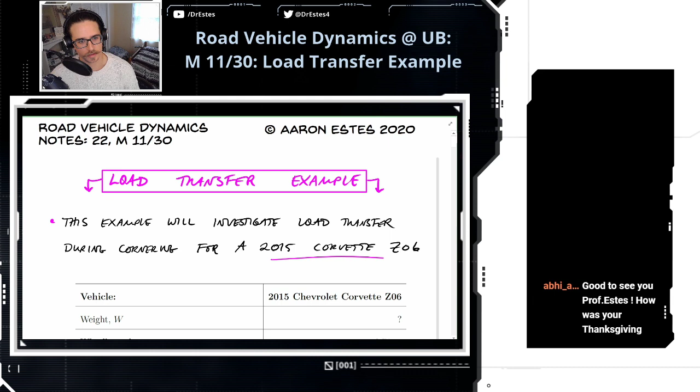So we've been discussing load transfer. When you corner, the weight shifts to the outside. We're going to look at a Corvette Z06, and here I have some vehicle specifications. We'll be coming back to these, we'll need to use these because we're going to have some questions related to cornering with this vehicle. So we'll come back to this.

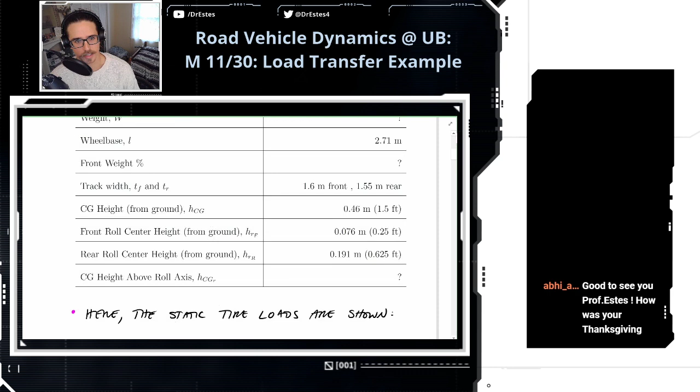But let's look at the static tire loads, and let's just start breaking down some basic characteristics of the vehicle. Because you'll notice up in the table, there's a couple things I left blank, like the weight, the front weight distribution - actually these will be pretty easy to calculate. This one will take a little bit more work - the height of the CG above the roll axis. So first we'll knock out these quantities and fill out these vehicle specifications that we're going to need later on.

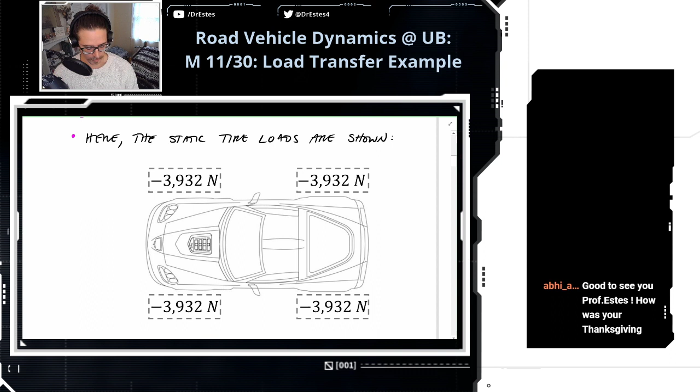Okay, so these are the static tire loads on each tire, so these are the normal loads, the vertical load on the tire. You'll see that the right front, right rear, left rear, they're all the same. So let's first get the mass from here - the vehicle mass, number one, can be determined from the tire loads.

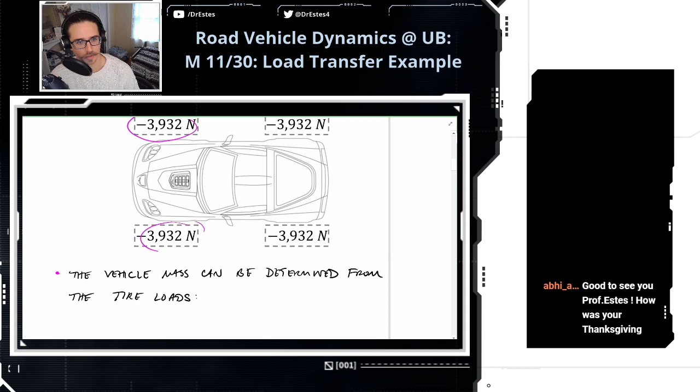So the mass is going to be the weight of the car. Let's get the weight first. That's the load on each tire, and we got to multiply it by 4, so that'll be the total weight of the car. Then we need to divide this by gravitational acceleration to get the mass.

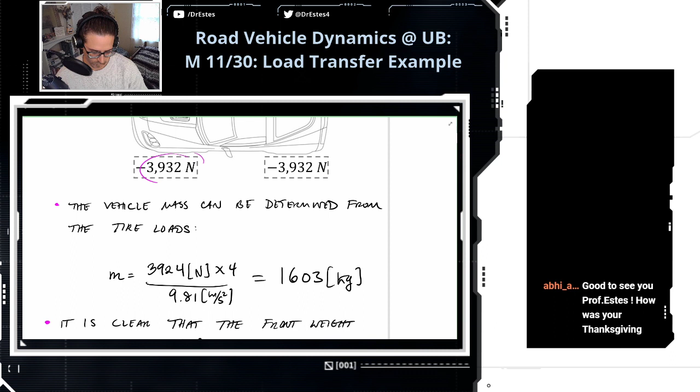If you punch these into your TI-83, or maybe one of those old school solar powered calculators, you're going to get 1,600 kilograms. So that's the mass, determined from the tire loads.

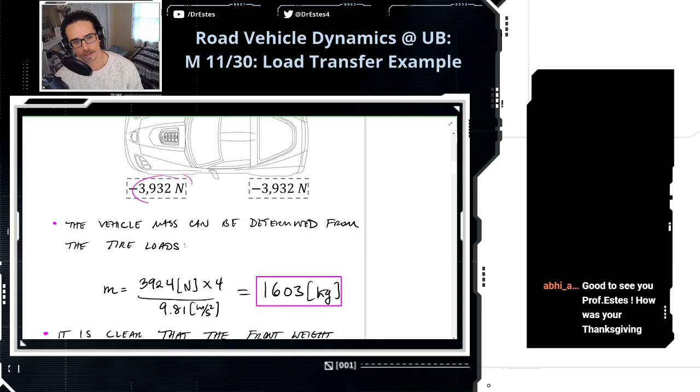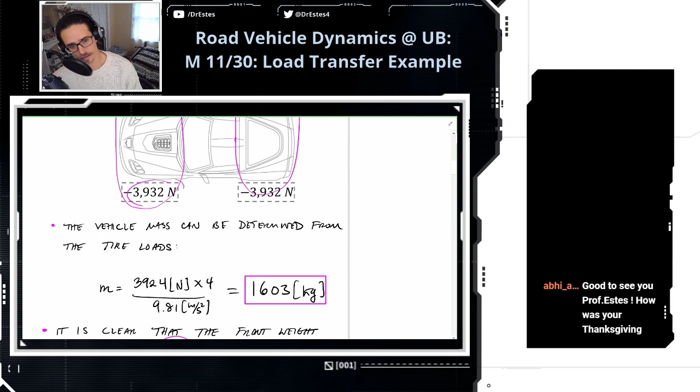What about the front weight distribution? It's clear that every tire is equally loaded, so 50% of the vehicle weight is on the rear and 50% on the front. We call this a 50% front weight car. Sportier cars tend to be close to 50%, sometimes even a little towards the rear, especially if you have a rear engine, which is pretty rare. So the front weight distribution is 50%.

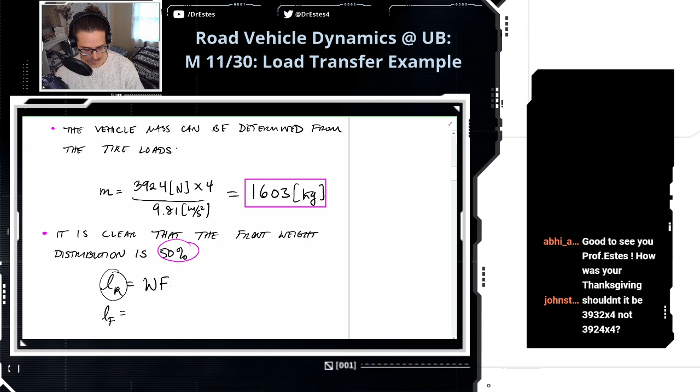So the distance from the rear axle to the CG, that's our front weight ratio, which is just 0.5 times L, the wheelbase.

Shouldn't it be 3932 times 4, not 3924 times 4? Oh, good grief, wait, why did I write 24? Thank you very much, Johnston. Wait, is my number still right? I don't know why I wrote 24.

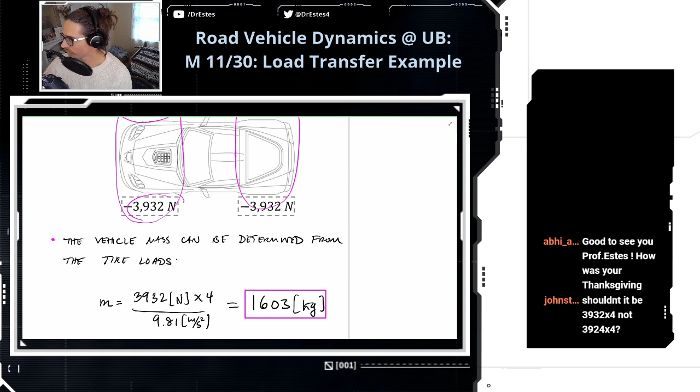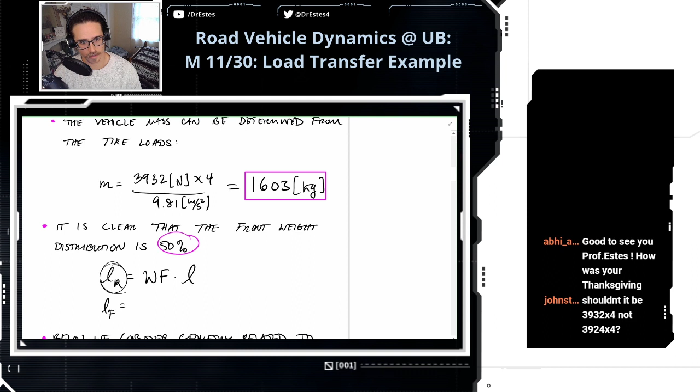So the distance from the rear axle to the CG is the front weight times the length of the wheelbase, which is 2.73 meters. So we got 0.5 times 2.7, or wait, was it 2.71 meters? I got to check the table. 2.71, okay.

So that's 1.355 meters from the rear axle to the CG. If you want the distance from the front axle to the CG, you just take the total wheelbase and subtract that distance above, because these two distances have to add up to the wheelbase, and they're equal. Not unexpected, since it's a 50% weight distribution, so these distances should be the same.

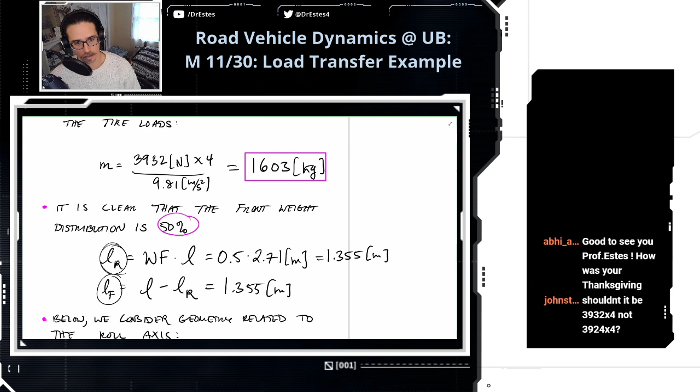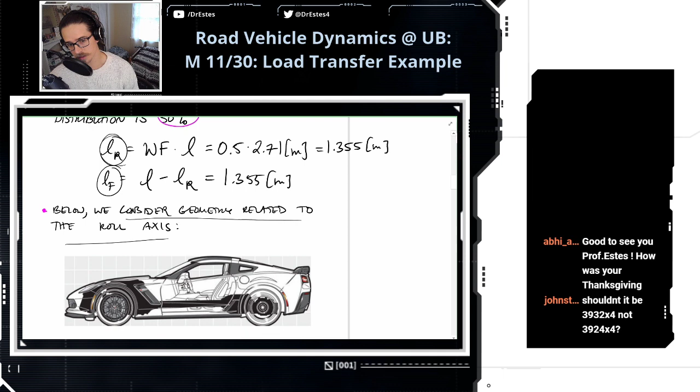So we have the mass, we have the weight distribution, we have LF and LR. Now what I want to do is get some geometry related to the roll axis here, because this is going to be important for load transfer. We're going to draw on this figure in a second, but first we want to get the height of the roll axis.

Let's just start filling in things. We're going to need the height of the CG above the roll axis, but first we need to define the roll axis here. The way to start is first to define the height of the front roll center, the height of the roll center at the front axle above the pavement.

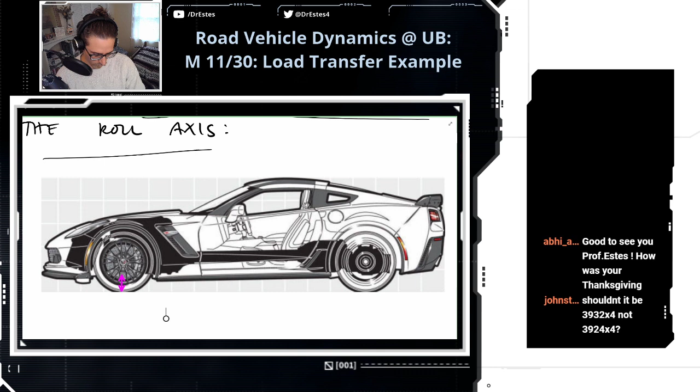You can figure out where this roll center is by looking at the front view of the suspension linkages and determining the instantaneous center, which we did as an example maybe a week or two ago. Maybe we'll do another one of those later. But for a sporty car, the roll center at the front is going to be pretty low to the ground.

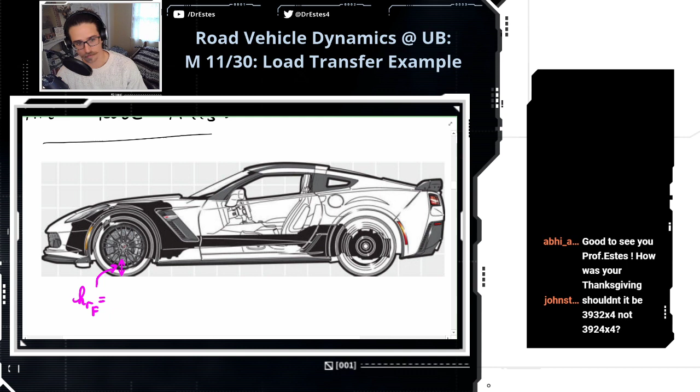From our table, the height of the roll center at the front axle is 0.076 meters, which I think is just like a couple inches. At the rear it's a little bit higher, but still very low to the ground, something like this. So the height of the roll center at the rear is 0.191 meters.

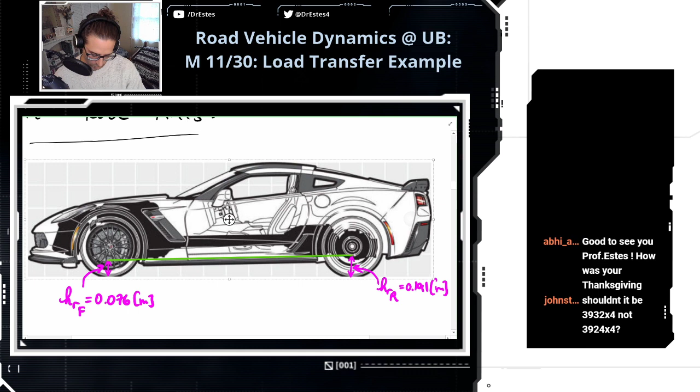Now the roll axis is when you connect these two points from the front to the rear. Let's get a green color here. So I'm going to take the front roll center, extend it back to the rear roll center, and connect them. And here we have the roll axis.

Now this is the axis about which the chassis rolls when you're cornering. This roll axis will actually change a little bit as the body rolls, but we're assuming that it's going to remain constant. A pretty good approximation, but not perfect.

So we're going to locate the CG here, and that depends on the weight distribution. First let's define this dimension, the wheelbase L, 2.71 meters. Now where is the CG within the wheelbase? Well, you can use LR or LF, and since this is a 50% front weight distribution, it's right in the middle of the wheelbase.

Let's try to draw directly in the middle, I'm judging this by eye. Looks perfect, looks fantastic. So this distance that I'm marking out is LR, the distance from the rear axle to the CG.

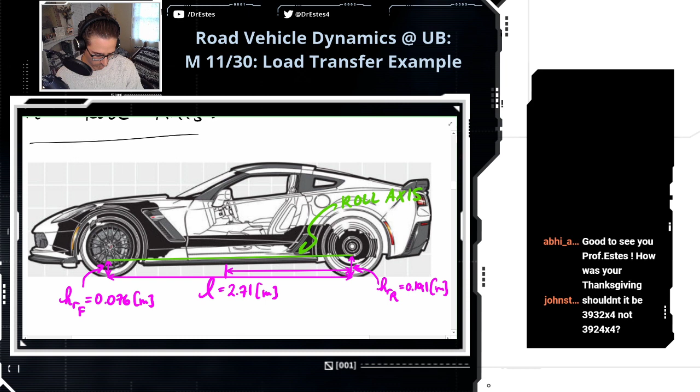And we calculated that to be 1.355 meters, so just half of 2.71. Now the CG, we have the CG height. Let's draw a little line right here, because the CG is going to be located along this line. And it's a height of 0.46 meters. What is that in the table? 1.5 feet.

All right, so we're going to try to draw the CG 1.5 feet above the ground. So I'm going to draw a circle, and I'm going to say this is 1.5 feet. And then we're going to use artistic skills to really dial this in. Come on now. Nice, says CP Alpha, thank you.

I expect all of you to spend as much time and care as I just did when you're drawing your CG. Okay, so we know that this CG is 0.46 meters above the pavement, one and a half feet. All right, now when we're doing load transfer, we're interested in the height of the CG above the roll axis. So I'm talking about this height, the height of the CG above the roll axis, so that's a subscript R on there.

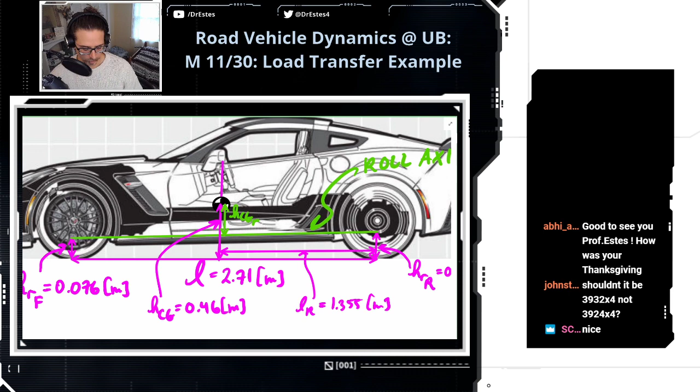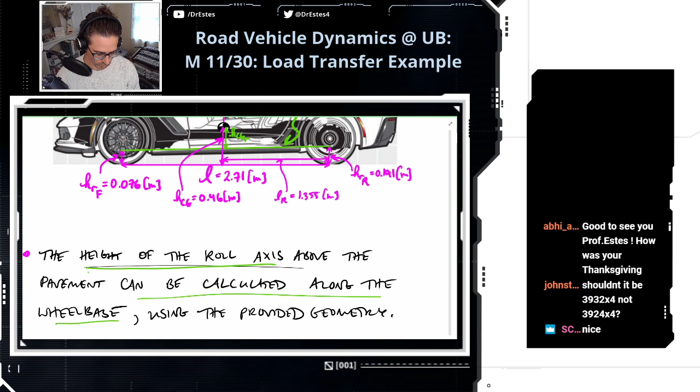So we're going to have to use some trigonometry to figure this out. I have a way that I like to do it, and I'm going to show you below. Okay, so the height of the roll... First, let's just make a function for the roll axis. So the height of the roll axis above the pavement can be calculated along the wheelbase using the geometry that we provided up above. All right, so let's just call the height of the roll axis...

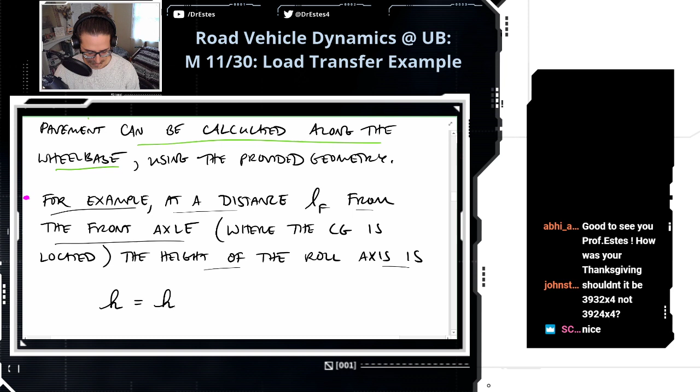So, okay, let's say, for example, at a distance LF from the front axle, which is just where the CG is located, this is going to be the height of the roll axis. So I'm going to think of this just like drawing a line. Like at the front axle, the height of the roll axis is the height of the roll center at the front.

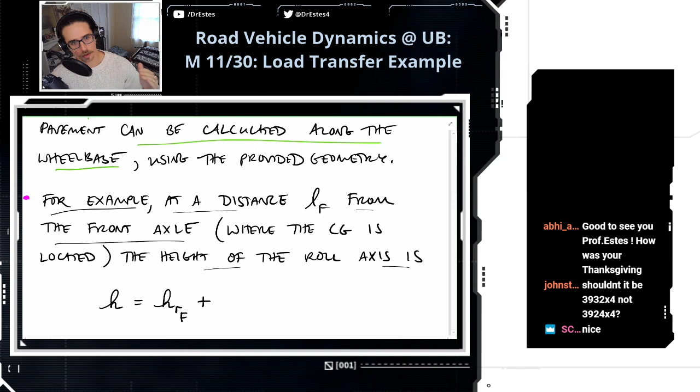And then, how does the roll axis change? Well, it has some slope as it goes towards the rear axle. So you can see that this is slightly inclined upwards because the roll axis or the roll center is higher at the rear. So what is that slope? Well, it's going to be the height of the roll axis at the rear minus the height of the roll axis at the front, divided by the wheelbase, right? That makes sense, that's the slope.

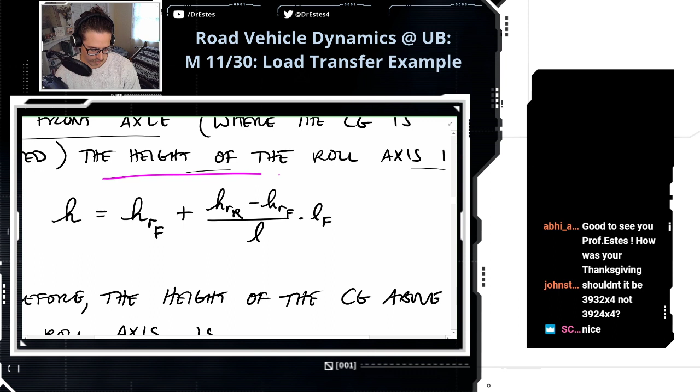And this slope relative to the front axle, it's increasing over a distance LF. So this is going to be the height of the roll axis at the CG. So to get the height of the CG above the roll axis, we just need to take the height of the CG above the pavement, subtract the height of the roll axis at that point. And why don't we just substitute what that is? So it's the height of the roll center at the front plus this slope acting over a distance LF.

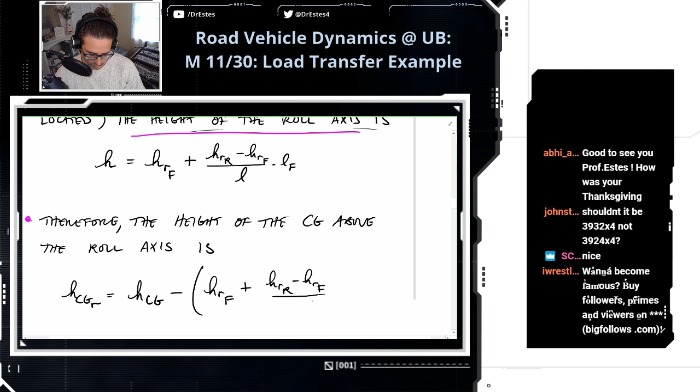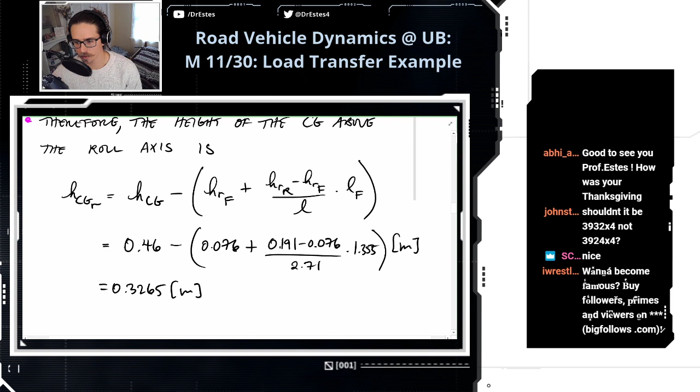So let's plug in some numbers. Let's get the height of the CG above the roll axis. So it's 0.46 meters minus 0.076 meters, plus 0.191 meters minus 0.076 meters over the wheelbase, 2.71 meters, and then LF, what is that, 1.355 meters? Okay, and then we get 0.3265 meters, so like a third of a meter. Let me ban that thing. Okay.

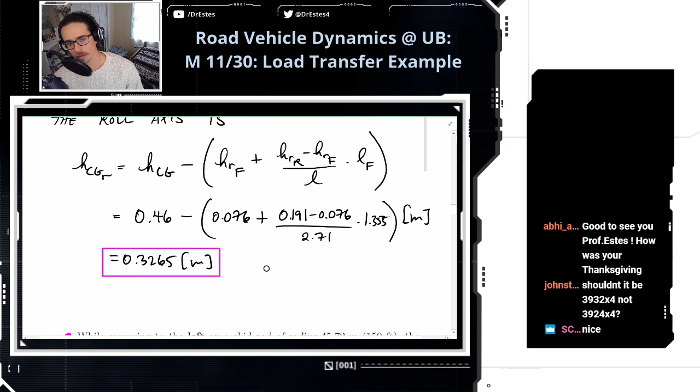Whew, okay, so I think we have everything we need. Now let's introduce the cornering problem. We have all these dimensions and stuff. So here's the story: while cornering to the left on a skid pad of radius 150 feet, the Corvette reaches a maximum speed of 51.9 miles per hour before the tires start to lose traction. So this is just like a standard skid pad test to determine the maximum lateral acceleration capabilities of the Corvette.

Now, sensor data indicates that the roll angle at this maximum acceleration was 3 degrees, positive 3 degrees of rotation about the longitudinal body axis. So based on this information, let's estimate the total roll rate, K phi F plus K phi R, that's like the resistance to rolling, like a torsion spring, for the Corvette. Okay, so let's do it.

The first thing we need to do is we have a formula for what the roll angle of the sprung mass is. The sprung mass is the mass above the suspension. We derived this using Newton's laws. So we have the mass times the lateral acceleration times the height of the CG above the roll center, which we now have, divided by the total roll rate, K phi F plus K phi R.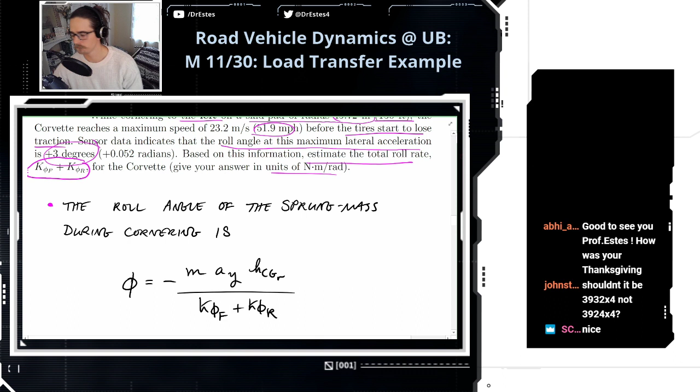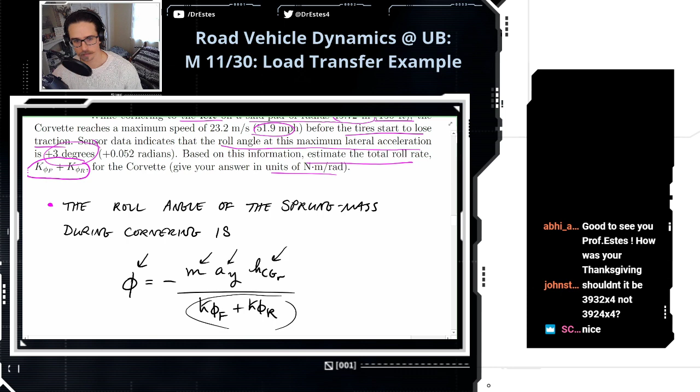Okay, so we have mass, we have the height, the angles given to us. We're solving for this total roll rate. We need the lateral acceleration because we have not calculated that yet.

So the lateral acceleration we can determine from the kinematics of circular motion. The car's moving in a circle on the skid pad, and so the lateral acceleration, at least the magnitude of it,

is the velocity squared divided by the radius of the circle. So we were moving 23.2 meters per second around this 160-foot radius skid pad. So we square that. We divide by 160 feet, but in SI units. And we're going to get 11.8 meters per second squared of lateral acceleration. So what is that, like 1.2 Gs or something?

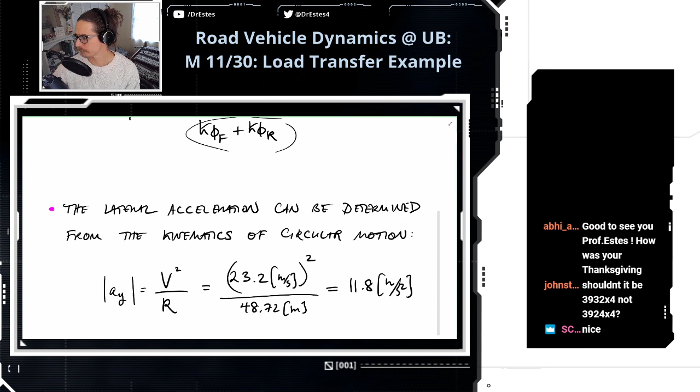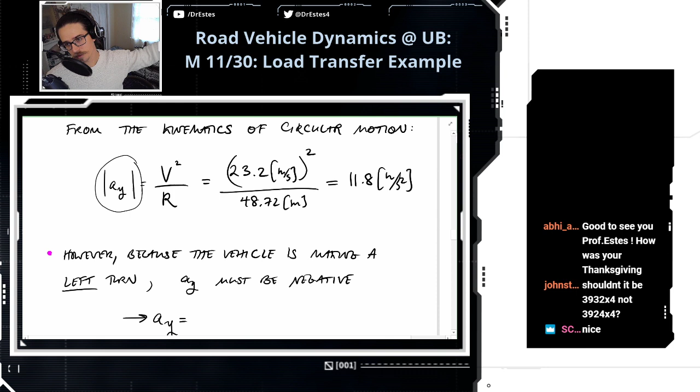Now, this is the magnitude of the lateral acceleration. But let's remember the vehicle's making a left turn. So in SAE coordinates, Society of Automotive Engineers, if you're accelerating to the driver's left, that's a negative sign. So AY must be negative. If we were cornering to the right, it would be positive.

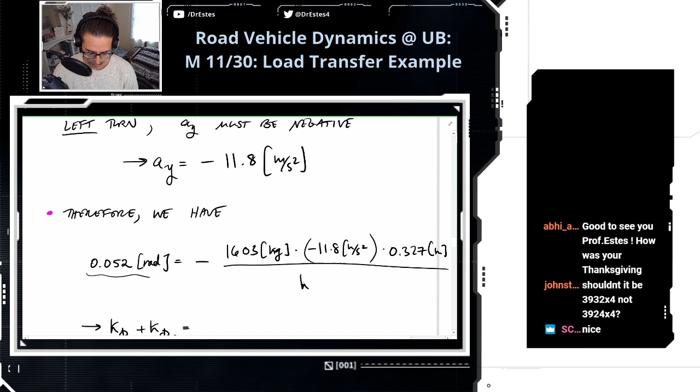Okay, so now we can solve for the total roll rate because we have everything we need to plug into this equation right here. So here we go. This is 3 degrees. So we're just using the formula up above. So we have the negative of the mass, which we got from the static wheel loads. We have minus 11.8 meters per second squared, which we got from circular motion kinematics. We have the height of the CG above the roll center, which we got using trigonometry. And so this is divided by K phi F plus K phi R.

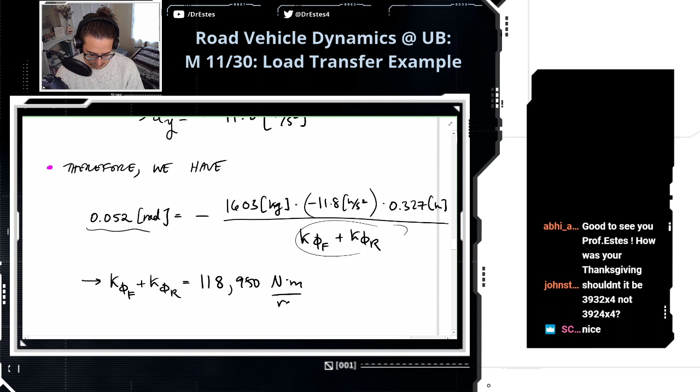All right. So then if you just move this over, solve for it, you're going to get 118,950 Newton meters per radian. That's the total roll rate of the vehicle. So a pretty stiff suspension overall, which results in only 3 degrees of body roll at over 1 G of lateral acceleration.

So if you did this in a minivan or something, you would expect 6 or 7 degrees, 8 degrees of body roll. If you could even get up to a G of lateral acceleration, I don't think you could in a minivan.

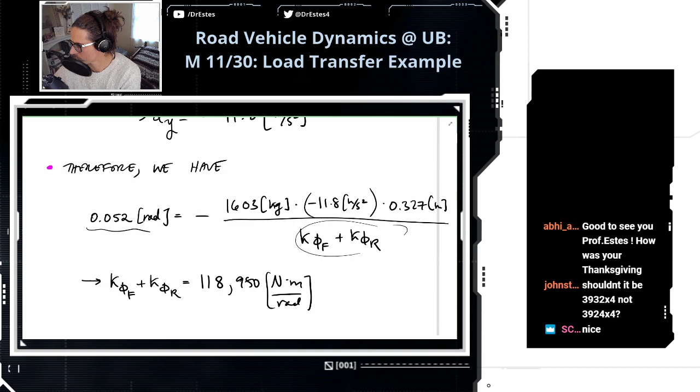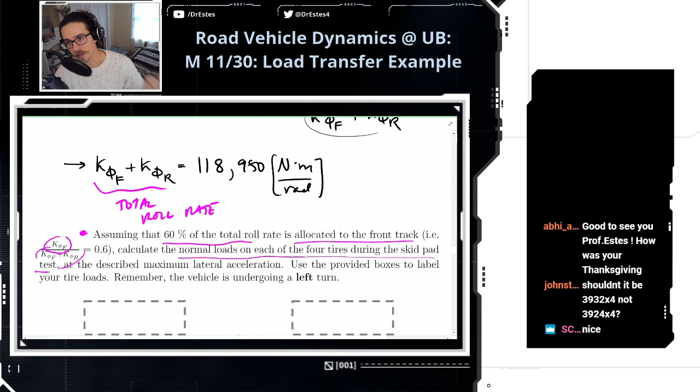Now, here we go. Let's make this a little more realistic. So this is our total roll rate here. But let's assume that 60% of that roll stiffness is allocated to the front track, so your front suspension. So that means that K phi F over the total roll rate is 0.6. So what we're going to do, assuming that 60% of the roll rate is at the front, we're going to get the normal loads on each of the 4 tires during that skid pad test. We're going to predict them. And we'll come back here and fill in these boxes with those loads.

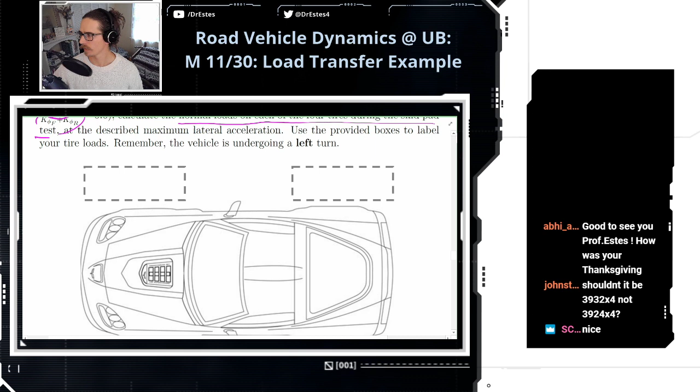All right. So let's first write an expression for all of the tire loads. So left front, left rear, right rear. So these are the formulas we've been using.

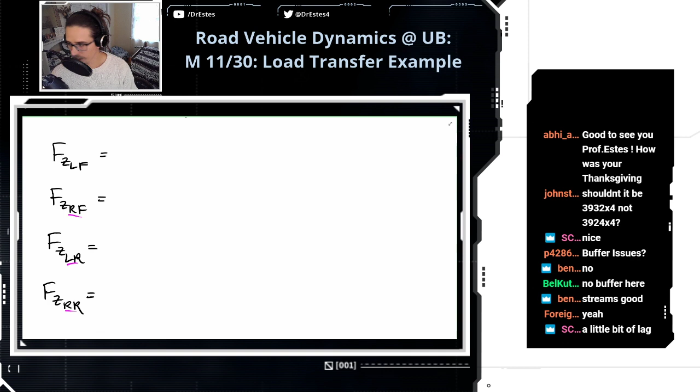So I'm just going to put the static loads here. These are the loads on the tires when it's just sitting still on the pavement, not cornering or anything. FZ at the rear. So this O that I'm putting down there, that just indicates the static load. And because this was 50% front weight, the static loads are the same for every tire.

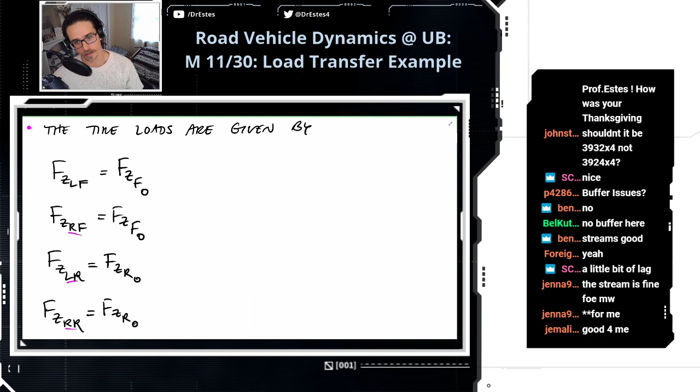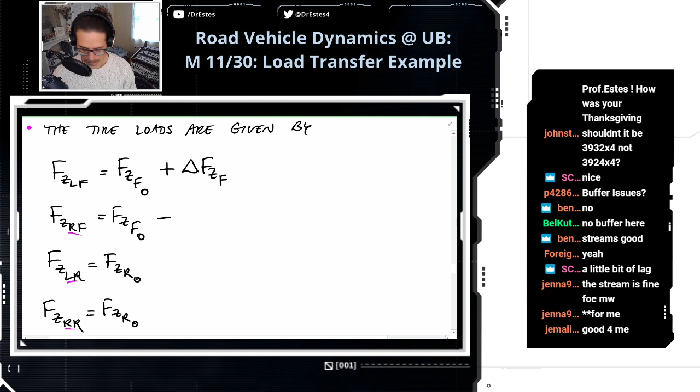Okay, but when we corner, we're going to have load transfer. So we're going to have this delta in the normal load minus. And so we're going to use a formula for this delta. The sign of this term can change depending on the direction of cornering, which is perfect.

Okay. So let's fill in what we know so far. We have the static loads. And then we'll just have to add in the load transfer. We'll put that in.

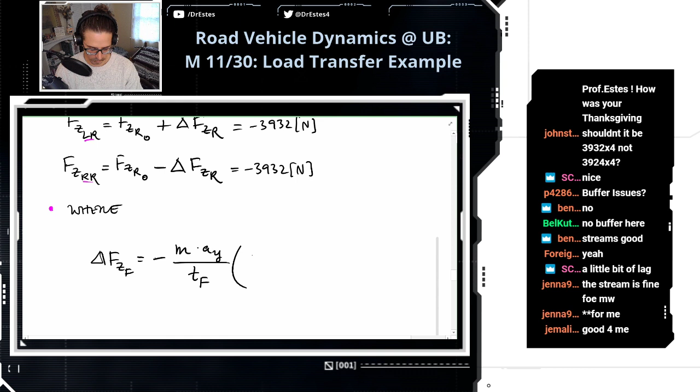All right. So what is the load transfer at the front? We have this expression. The mass times the lateral acceleration divided by the front track width times LR over L, which is the front weight distribution, times the height of the roll center at the front, plus the front roll stiffness distribution, so that's K phi F over K phi F plus K phi R. So this will be 60% right here, times the height of the CG above the roll center.

All right, let's crunch the numbers. We have the mass, 1,603 kilograms. The lateral acceleration, the sign is important here. Minus 11.8 meters per second squared. We're cornering to the left. We have the front track width, 1.6 meters. This is going to be a little different than the rear track width. I think the rear track is a little bit wider.

Okay, the front weight distribution, 50%, 0.5. The height of the roll center at the front, 0.076 meters. And then we have 60% front roll stiffness, so I put a 0.6 there. And then we multiply by the height of the CG above the roll center, close to 1/3 of a meter.

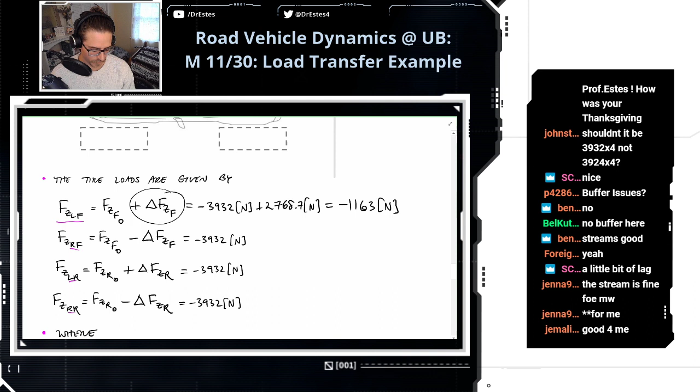Well, it's actually losing normal load. The front left tire is lifting off a little bit, and now there's less weight on it. Does that make sense in a left-hand turn?

Okay, and then this right one, it's gaining load: 6,701 newtons. Do these numbers make sense to your intuition? Left tire loses load, right tire gains load.

And we're cornering that way. Pavlo says, yes, it makes sense.

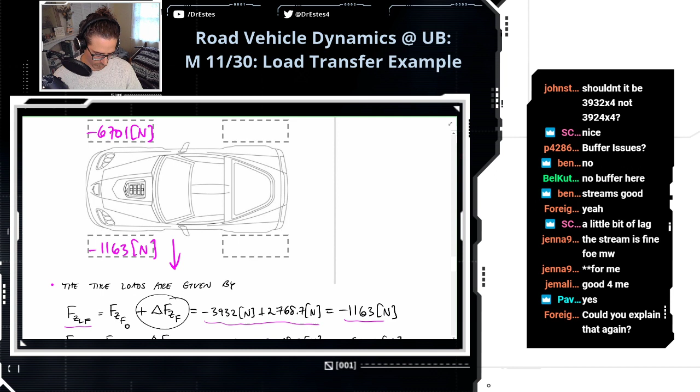Foreign Wanderer, could you explain that again? Yes, yes, yes. Okay, so imagine yourself, imagine yourself smiling, driving this cool Corvette. Here's the steering wheel, and you're turning to the left. What are you going to feel? And actually, what is your friend going to feel over here?

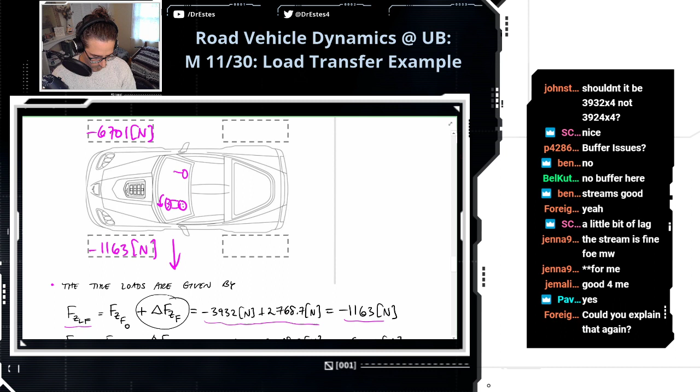When you turn that steering wheel to the left, it's like you feel yourself being pulled this way. We've all experienced that. And the car is actually rolling that way, towards the right-hand side. So we are putting more weight on the outside tires. Yes. Good, good, good. So this is a double check I always do in my mind. The outside tires are gaining load.

Good, good, good. All right, let's do the rear. So, 2761.6 newtons. So now we gotta do this. So they have similar load transfer, but for different reasons.

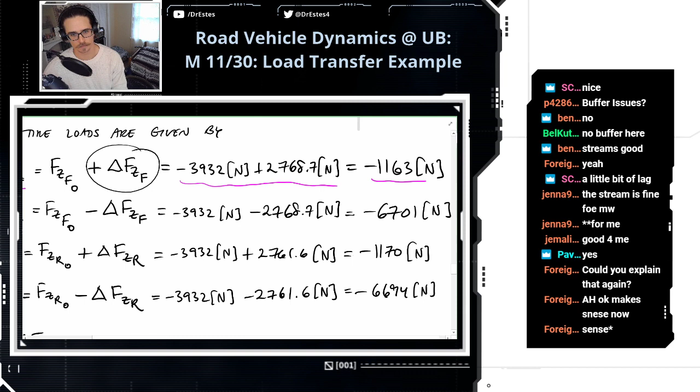That's part of the fun of cars, that there's more than one way to get to the same place. That's why we have very different looking cars. Racing is a very dynamic sport. Things are changing.

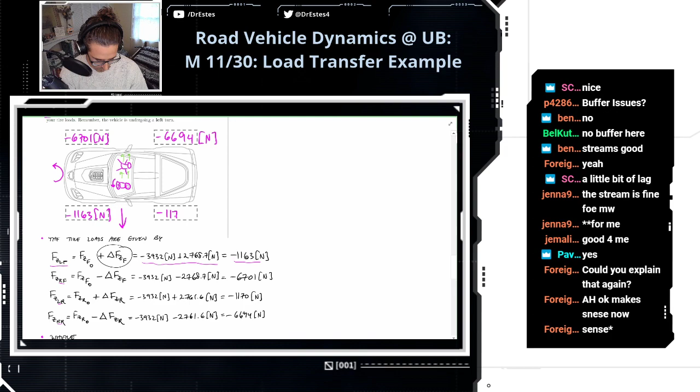All right, so we see we're cornering this 150-foot radius skid pad. We're turning left, and we have much more load on our outside tires than our inside tires. At this point there's 3 degrees of body roll in that direction, and it's at this point that the tires start to lose traction in this test, at a little bit over 1G.

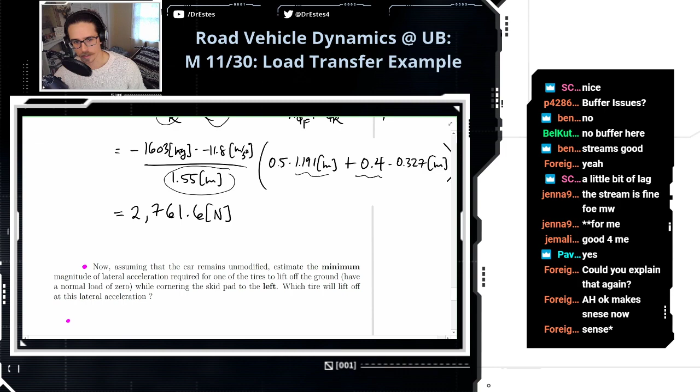One more question here, this is interesting. Assuming that the car remains unmodified, the same car, what would be the theoretical minimum magnitude of the lateral acceleration required to lift a tire off the ground? And what does that mean, to lift the tire off the ground? Well, by definition, we'll say that tire now has no normal load acting on it. Enough load has transferred that the pavement doesn't have to produce any reaction force because the tire's just floating.

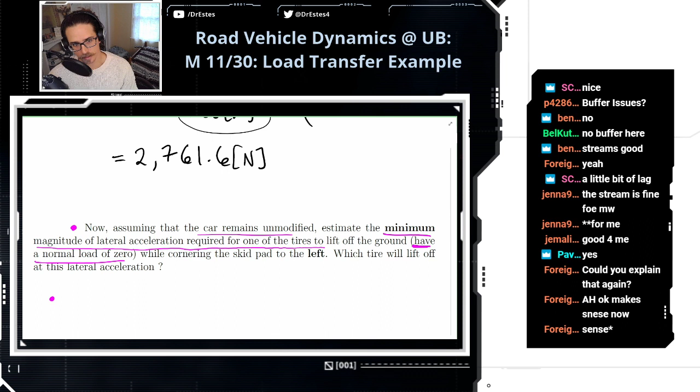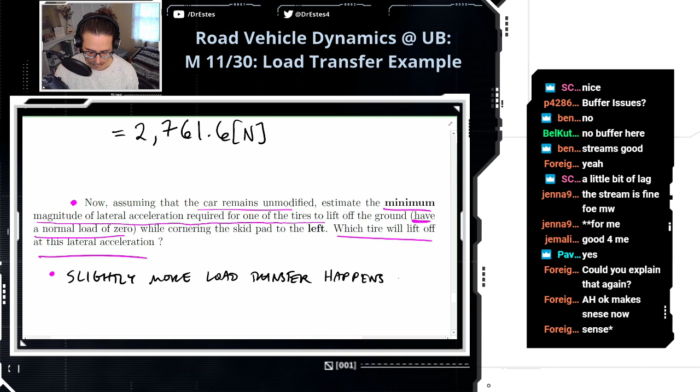And which tire do we expect to lift off first? Okay, let's talk this through. This situation is actually pretty unrealistic, and I'll get to that. So we found out that slightly more load transfer happens at the front for this car, and the static normal loads are equal front and rear. We just mean the weight front percentage is 50%, so they all start at the same place.

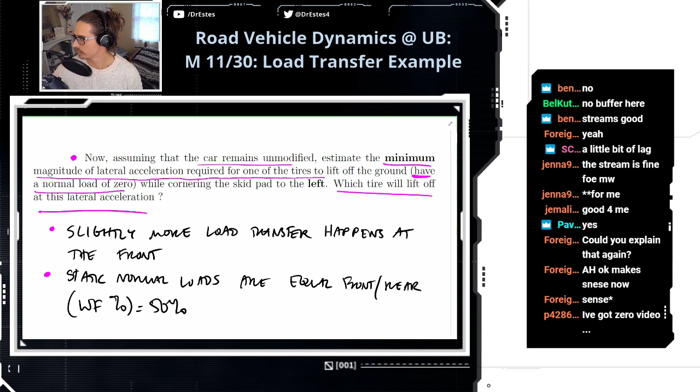For that reason, we expect a front tire to lift off first, because they start with the same static load, but more load transfer is happening at the front.

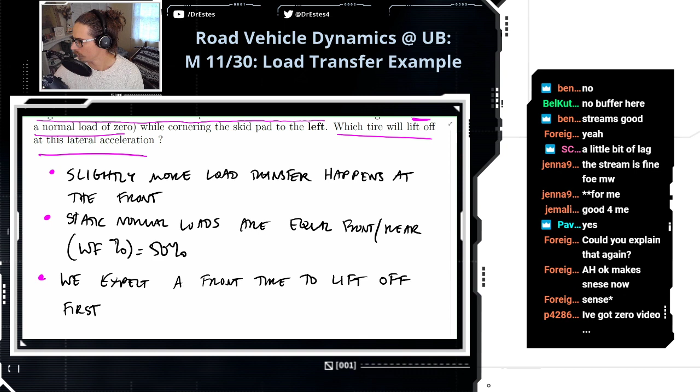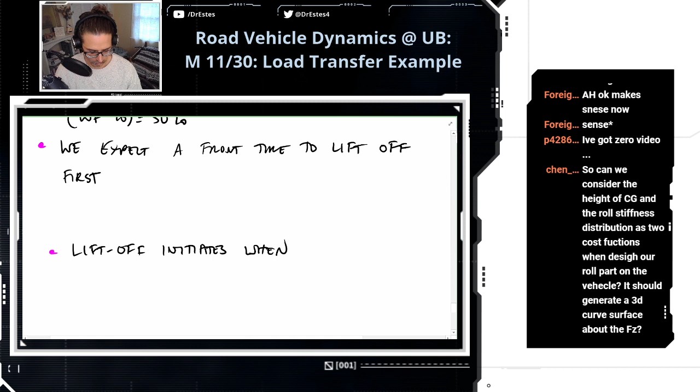Okay, so when is this going to happen? Liftoff is going to initiate when delta FZ at the front, the amount of load transfer, is equal to the static load.

Okay, Chen has a question. So can we consider the height of CG and the roll stiffness distribution as two cost functions when we design our roll part on the vehicle? It should generate a 3D curved surface about FZ.

Okay, so Chen is talking about, what if I'm trying to optimize my load transfer? I think you're saying you could have two separate cost functions, like load transfer from geometry and load transfer from suspension, and treat them separately. Can we do that? Because you have these two terms added together.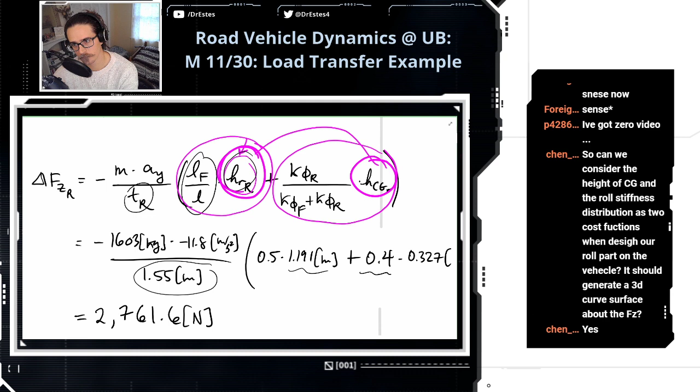Well, hold on though, I don't think they're totally independent, because this term affects this term, because that'll change the roll axis. That's tricky.

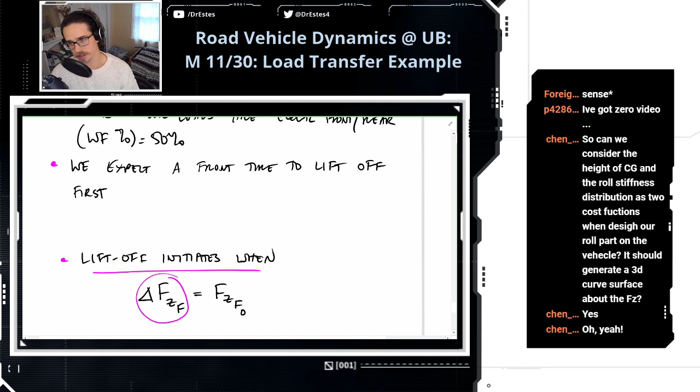Okay, so we're going to have liftoff at the front when the amount of load transfer is equal to the static load. So, try it out. Chen, let me know what you find. Okay, so we're going to get 3932 newtons, that's the static load.

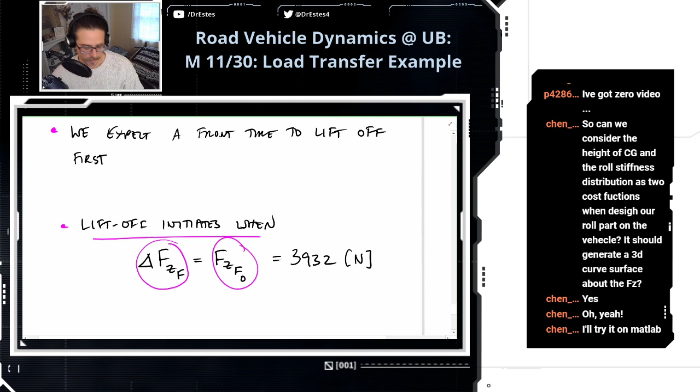So what I'm going to do, because we want to solve for the lateral acceleration where this happens, we're going to go back up to this equation, but we're going to assume that we already know what the load transfer is, and solve for the lateral acceleration as the unknown. So we just have to manipulate this equation to get the lateral acceleration by itself.

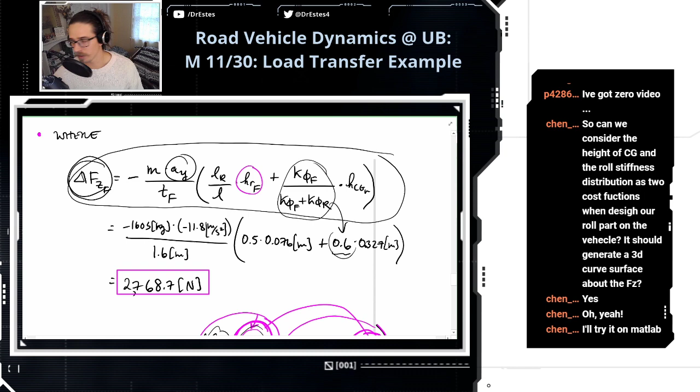Okay, so I got that. Okay, I guess I was going to put that there. So AY equals negative delta FZF times the front track width, divided by mass times the front weight distribution, the height of the roll center at the front, roll stiffness distribution, height of the CG above the roll axis. So that's just isolating the lateral acceleration from that equation.

And if you plug in all of the numbers, this is still for a left turn here, you get minus 16.8 meters per second squared. How many G's is that? 16.8 divided by 9.81 is 1.7 G's, which actually is not uncommon for formula cars. Not at all, a formula car can get like 4 G's, something like 6 G's in a corner.

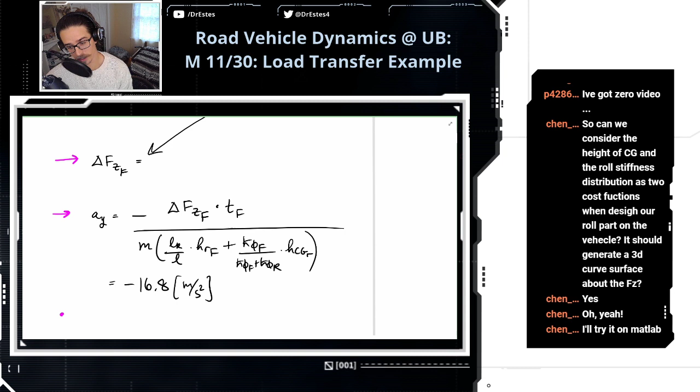But that amount of lateral acceleration would flip over a Corvette. That's kind of funny to think about, isn't it? But I have a point to make here. This would likely never happen in a Corvette, because the tires are responsible for producing this lateral acceleration, right? So where does the force come from? It comes from the tires.

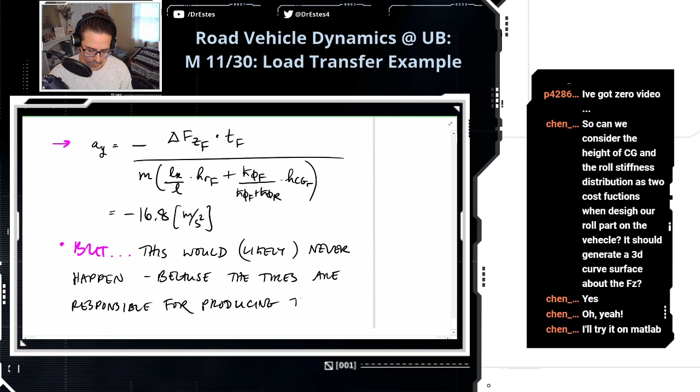The tires are responsible for producing this lateral force, but the tires start to slide before this maximum, or before this force is reached.

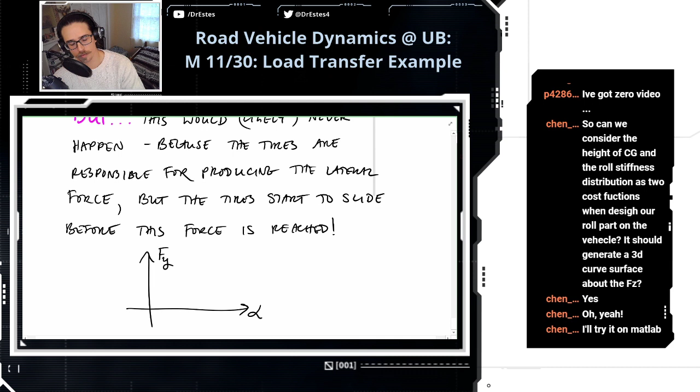So let's go back to this figure to explain this a little bit. How does a tire produce lateral force? We have Fy. Well, it produces lateral force with slip angle, and the function looks something like this. And this function changes with normal load too. If I put more weight on the tire, it's going to look something like this, it kind of gets steeper the more normal load you add. Actually, this peak should be shifted over a little bit.

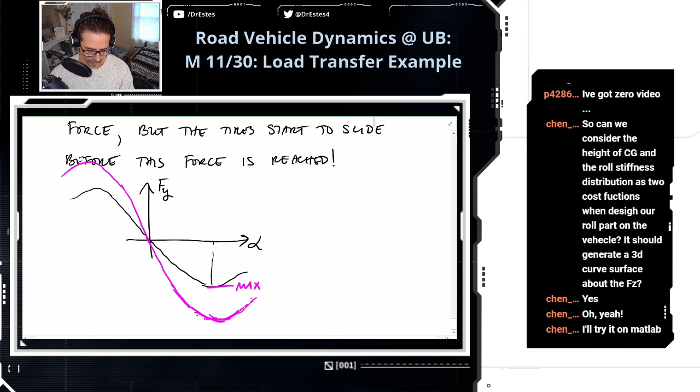At a given normal load, there's a maximum amount of lateral force you can achieve. If the tire slip angle goes past this threshold, the lateral force drops off and the tire starts sliding. I don't know if they specifically design sports cars this way, but the tires will start to slide before you reach the point of producing enough lateral force to actually flip the vehicle over.

If the car is designed nicely. Now, a good test for this - I've shown you this before, but it's good to pull up again - the Moose test.

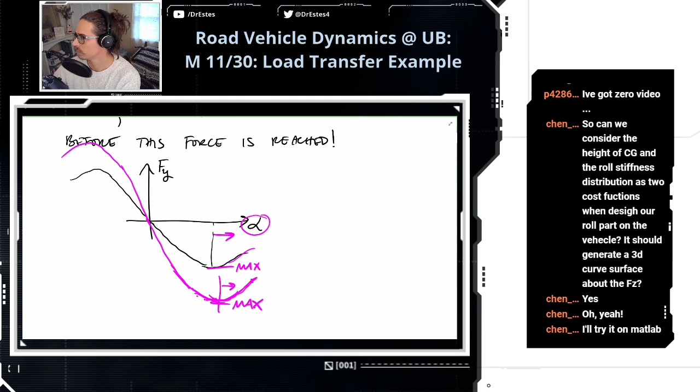Let's watch that again. It looked like the front tire picked up. Let's see what else is going on here. Front tire picked off. Fifth generation of Toyota RAV4, there's a bouncing effect through the car's movement. Little dangerous. The test that we ran with two different Toyota RAV4s had the same result - poorly the RAV4 performs. We'll show you.

Now, what I think is you can prevent this kind of rollover situation - it's caused by lateral acceleration. Like what's happening here, they have some speed and then do a sharp lane change, like a tight radius. It introduces a lot of lateral acceleration, and that load transfer picks off one of the tires. But I think it's more favorable or safer to design your car so that the tires give out before it can produce enough lateral acceleration to flip the car over.

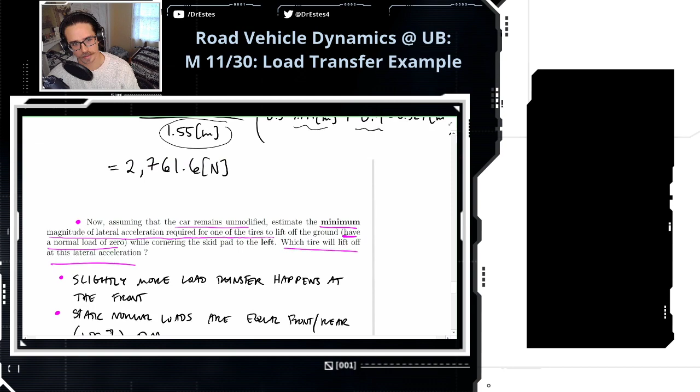Very fascinating. Okay guys, that's our example. I wanted to do this because we've derived a lot of formulas, and I think this example uses most all of the load transfer formulas that we've looked at, so it kind of makes it more concrete what we're doing here.

Let's see, we have... okay, bye-bye virtual assistant. Virtual assistant, by the way, is a chat bot, like an artificial intelligence. It fooled me before because I thought it has pretty sophisticated chat, and I've talked to it like a real person, and then I felt foolish.

They also have a video of the Model X doing a moose test. Oh, let's look at that.

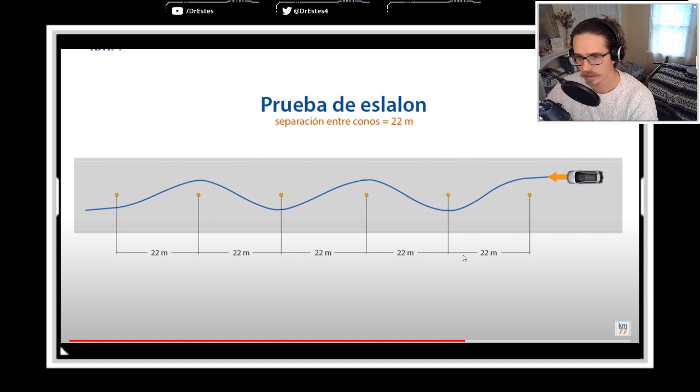It seems like it's fantastic in cornering.

Wait, what? How many cars do they test?